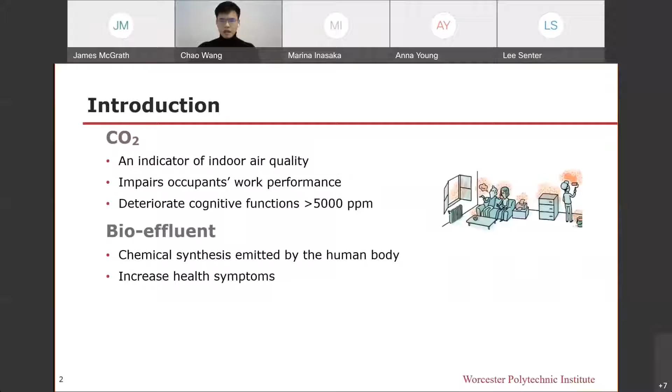Driving is a daily activity that needs mental workload, and in a window-closed vehicle the CO2 concentration is typically less than 2,000 ppm, but it can be as high as 4,500 ppm in the fully loaded condition.

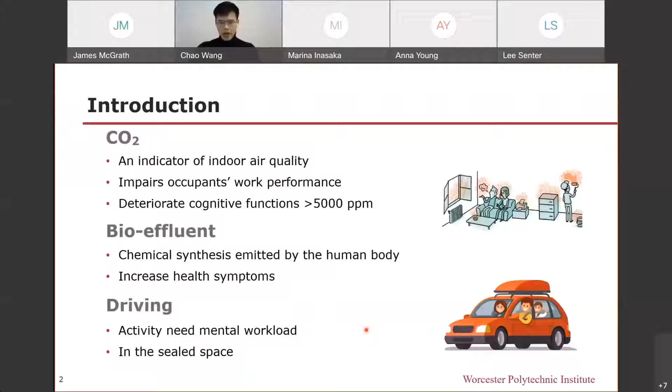Besides, the people in the vehicle also add bio-effluents in the cabin space. Every year, there are 6 million car accidents in the United States, and many people die in car accidents.

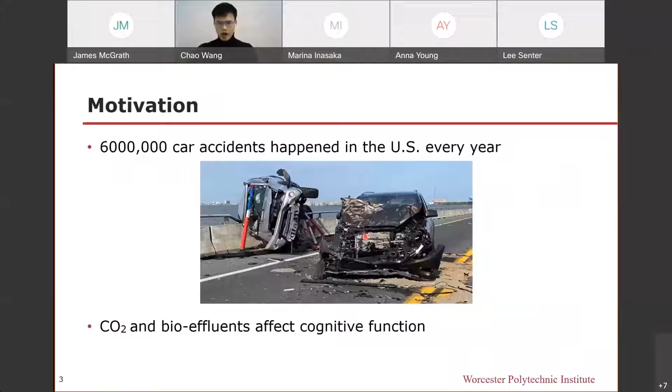The CO2 and bio-effluents in the vehicle have the potential to impair drivers' cognitive functions and driving performance, so it can result in car accidents. So we need to have a comprehensive investigation of the CO2 and bio-effluents' effect on driving performance.

In this study, we investigate how CO2 and bio-effluents affect driving performance, and whether they affect cognitive performance during driving.

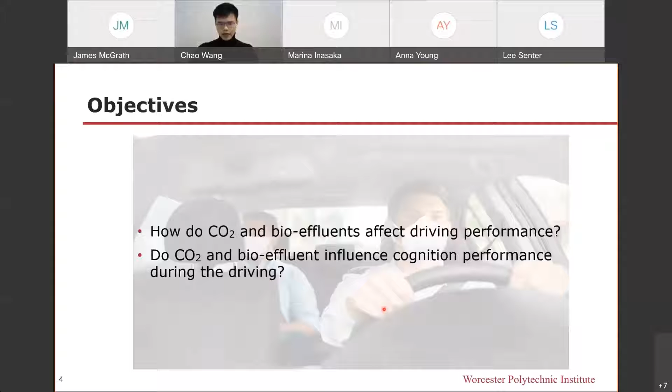We have 25 participants in this study. They are selected by the simulator sickness screening test, and we use 3 different CO2 levels in our study: 800, 1800, and 3500 ppm. The driving task should be with one of the CO2 concentrations.

Another environmental factor is the bio-effluent. One driving task should have or not have the bio-effluent as a factor. The bio-effluent is emitted by a T-shirt worn previously.

In the chamber, we keep the temperature and relative humidity in a steady state and same for all the driving tasks. We set the ventilation rate at 18 per hour. It is then used for the recirculation mode of the vehicle HVAC.

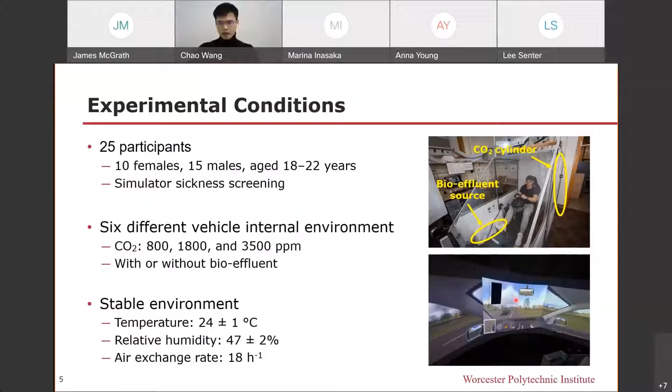The figure here is for the freeway driving used for all driving tasks. All the participants have 4 driving visits.

The first is for training and the screening test. Another 3 are for the 3 normal driving tests. We assigned the different driving conditions to the subjects randomly to address the order effect.

Each driving visit is about 1.5 hours, including wearing a sensor, taking a survey, and 2 driving tasks. Every driving task is about 18 minutes. 18 minutes is a critical commuting driving time.

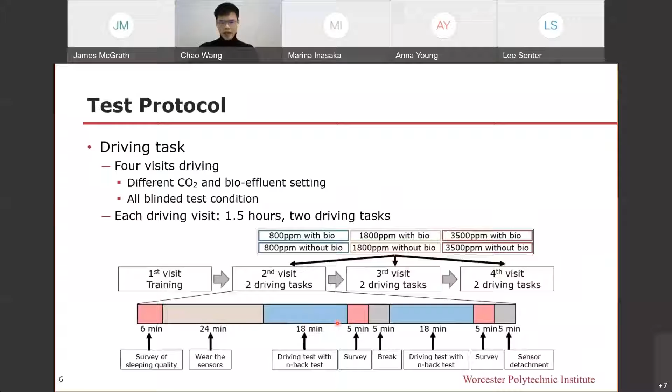For the secondary task, we use n-back. It is one of the most common cognition tasks that impose and measure mental workload. We use 3 different levels of n-back tasks for 3 different difficulty levels: 0-back, 1-back, and 2-back. We use the n-back to simulate using the phone or other entertainment devices during driving.

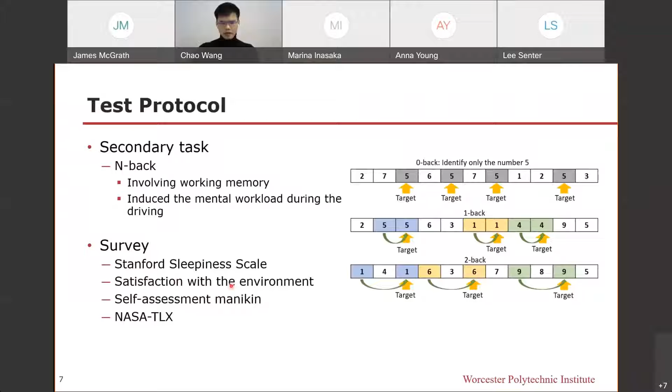We use the survey to measure sleepiness, feeling toward the environment, emotion, and mental workload after driving.

We use the accuracy and reaction time as an index of the n-back task performance, and we compare them in different driving conditions.

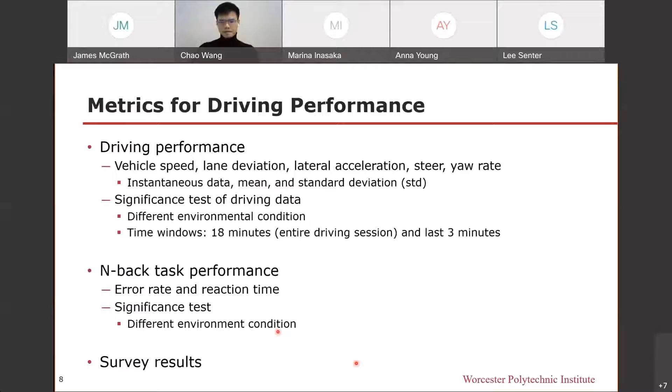The driving performance parameters can be classified as longitudinal control and lateral control. Speed is one of the longitudinal control measures, representing the driver's ability to maintain the car on the car running way.

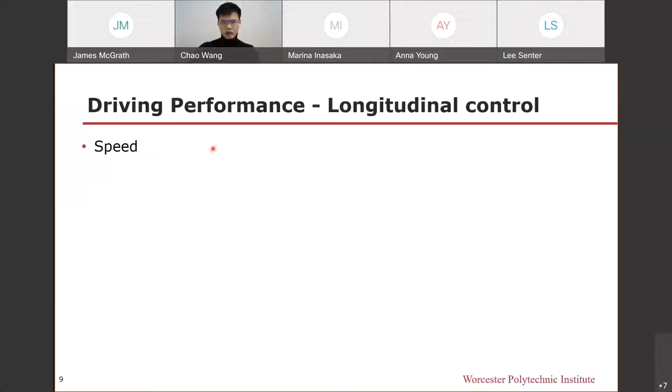In the last 3 minutes of driving, in the environment without bio-effluents, we can find CO2 has significant effect on the speed average between the low and the high CO2 levels. In the environment with bio-effluents, the CO2 has significant effect on speed standard deviation between the low and medium CO2 levels. The reason a significant difference happened in the last 3 minutes is CO2 needs more time to affect driving performance.

For the effect of bio-effluents, there is no significant effect of the bio-effluents on the speed performance.

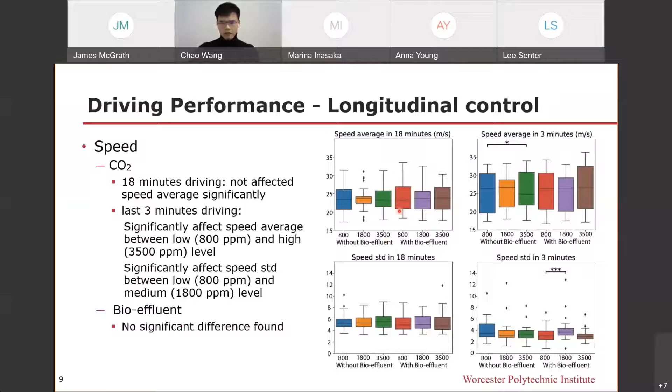The lane deviation is the index of the lateral control. Lateral control is how a driver drives on the road in terms of lateral rate.

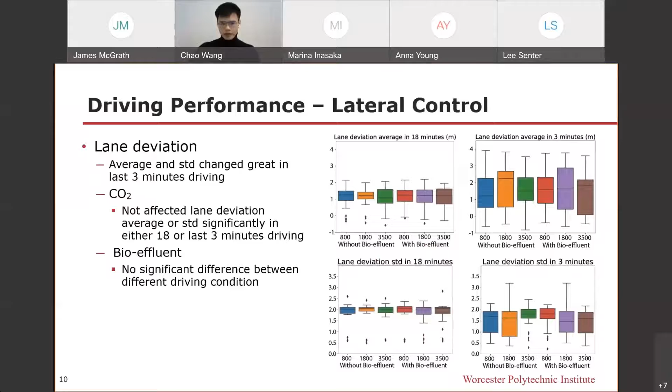For the reaction time, in the environment without bio-effluents, between the low and medium and between the medium and high CO2 levels, CO2 has a significant effect on reaction time. And when the CO2 is at a high level, we can say the bio-effluent has a significant effect on reaction time.

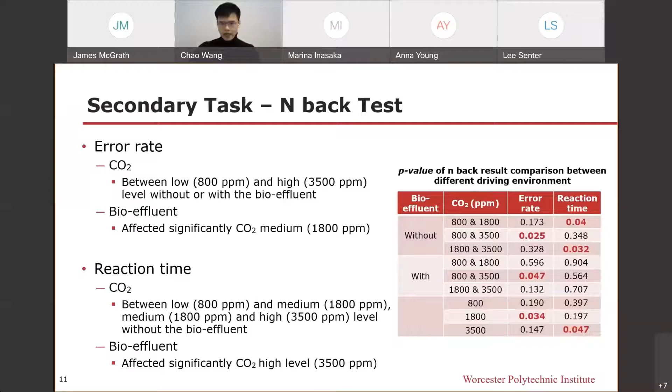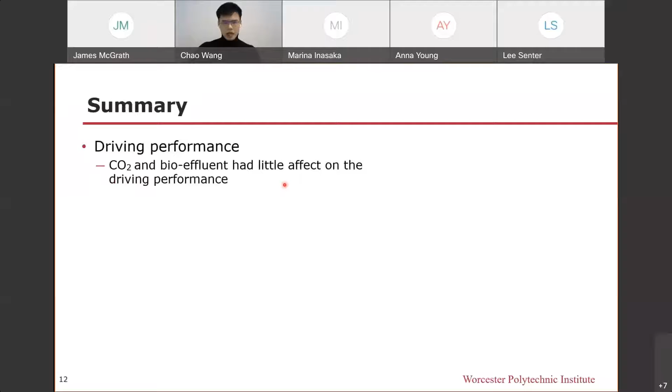So in summary, not only the speed and deviation I showed just now, but some other driving performance parameters also show that CO2 and bio-effluent have little effect on driving performance. Compared to driving performance, the CO2 and the bio-effluent have more effect on the cognition task.

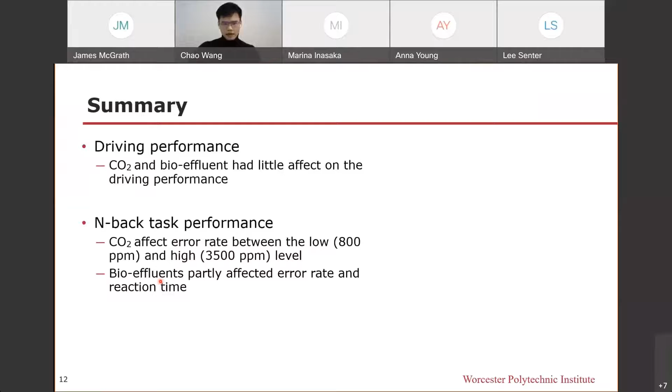So in the future, we will investigate the biosignal to see if CO2 and the bio-effluent have a significant effect during driving. We will use EEG or fNIRS, and we can show the difference in brain signal under different driving conditions.

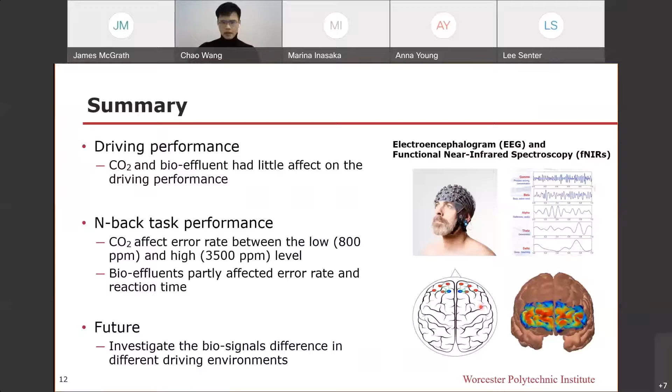Thank you very much. Let me just check the Q&A here. Please. Okay, don't see any questions. Yeah, there's one just on there. Sorry. Perfect. Yeah, sorry, do you want to?

Sure. From Benjamin Marshall, he asked: at the speeds the participants were traveling, how much distance did the change in reaction time cover? Sorry, could you say it again? I didn't catch it. Okay, so Benjamin Marshall asks, at the speeds the participants... oops, that just changed in front of me, sorry, I lost it. At the speeds the participants were traveling, how much distance did the change in reaction time cover?

So all of our driving scenarios are about 20 minutes of driving. I remember the distance is about... the average speed is kept at 50 miles per hour, so maybe it's about 10 miles of driving.